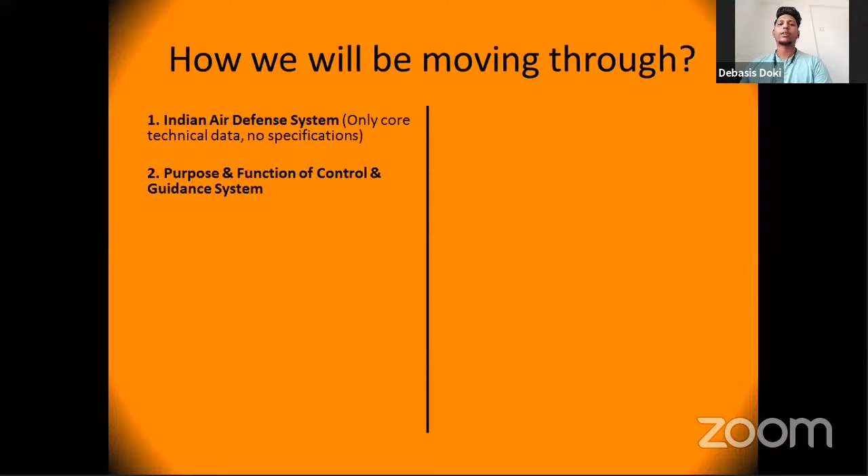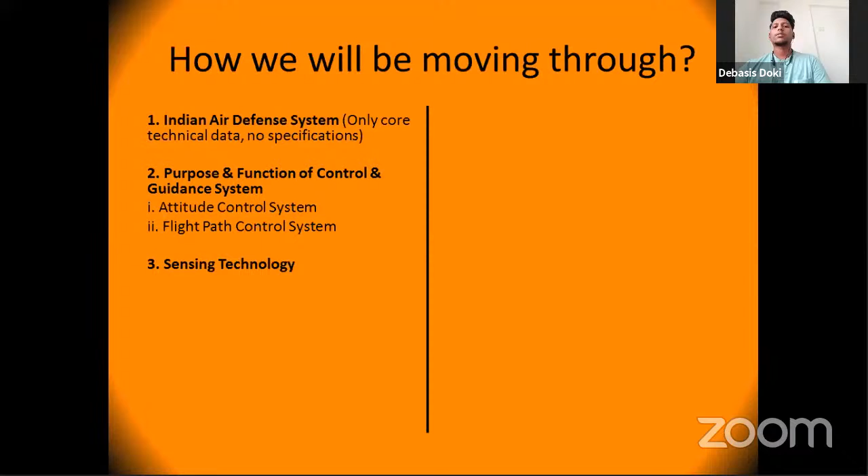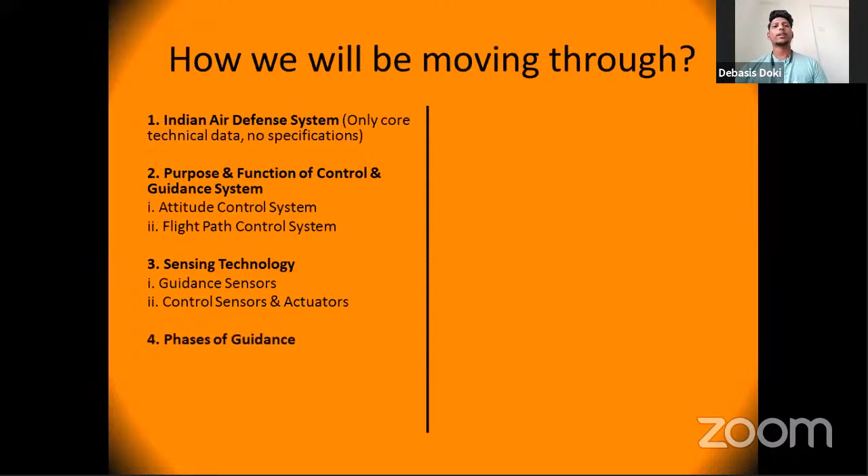Sorry for the inconvenience. Next comes the sensing technologies, which will go through the guiding sensors, the control sensors, and the actuators. After that, we'll be going towards the phases of guidance.

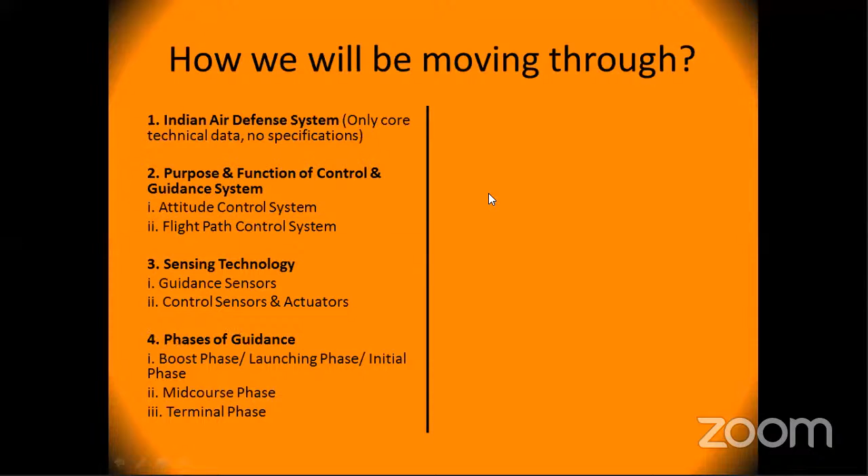I guess all these things will look something different, and why is he telling all this? So John, we can do one thing - you can move ahead, we can show them the list of what we are going through, and start with the approach of the first session itself.

These are the phases of a missile from its start to the terminal, that is till the end - we'll see how things go here. Then John will take you through the tour of control guidance missile, how to guide it, how to go ahead. Then there are different parts, different sectors - I don't want to read it out, you can already see it on your screen. We'll start, we won't waste our time.

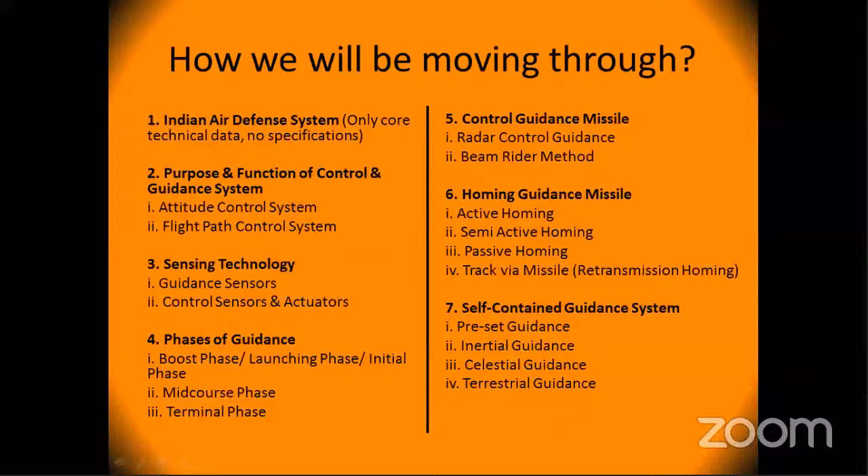We'll start with the first one, that is the Indian Air Defense System. To be honest, the Air Force is one of the biggest things - Indian Air Force is one of the biggest across the world. So how do you think they safeguard us? How do you think they handle each and every problem that comes around? There are different aspects - there are multi-layer air defense systems. When I say multi-layer air defense systems, it's because India is a huge country.

Everything cannot be determined through just seeing something and taking an action - there are things where you have to take actions earlier. I'll just give an example.

There are a lot of interception threats that come around. For example, if Pakistan or China releases a missile towards us, how do you understand it? If you see a missile right in front of you, you can't do anything - you're gone, the country is lost. So there are certain interceptors built here, which can be long range or short range, depending on us, so that it protects us against everything.

So we'll be coming to how the kilometers, how the distance matters, and what missiles we use for particular distances. We'll move ahead with that. So can you go ahead, John?

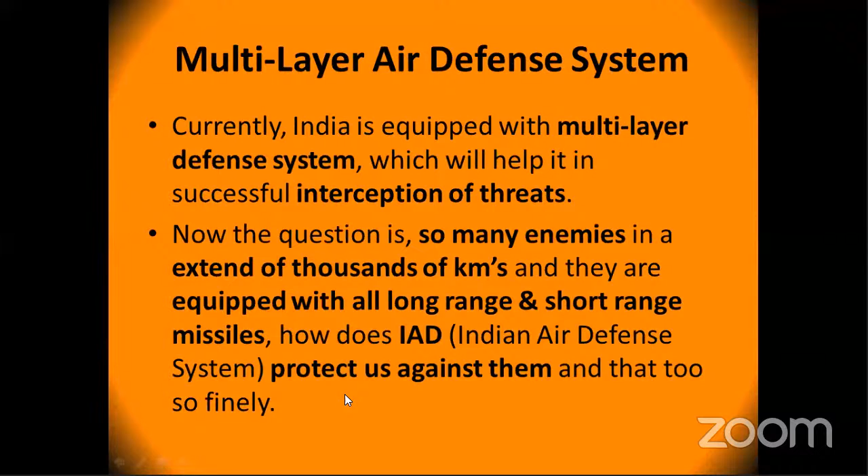Yeah, so this is where you can see the multi-layer defense systems. How does it look?

Okay, so let's go ahead, John.

Yes, okay, now perfect animation. I guess you might be getting a small idea about what this is. This circle was representing the range.

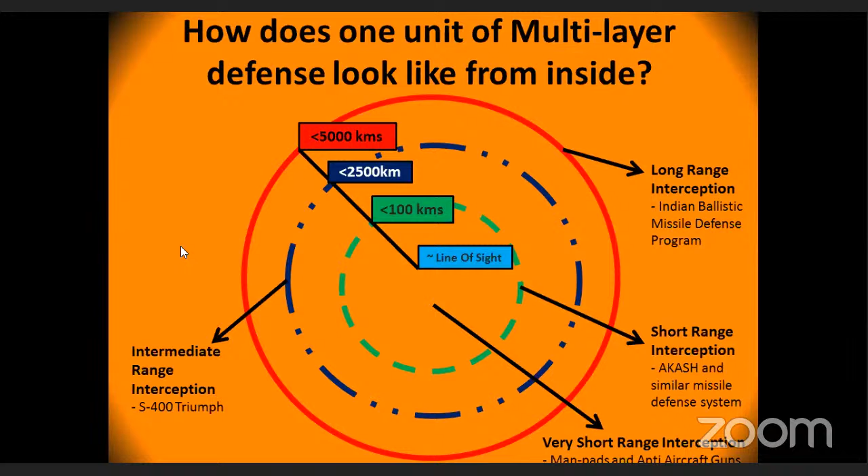And the final one, which is the line of sight, it's the very short range interception. Line of sight, the name itself says when you see a threat, you launch an anti-threat, like you launch a defense system. Okay, most of the manpads and anti-aircraft guns are used here. To give a precise example, many might have watched Race 3, that's of Salman Khan, who just launched a bazooka from one hand. So that is a kind of manpad - the bazooka is one of the manpads used in the area of line of sight.

I hope we understood about the ranges, the different kilometers, how things go, and what are the missiles used.

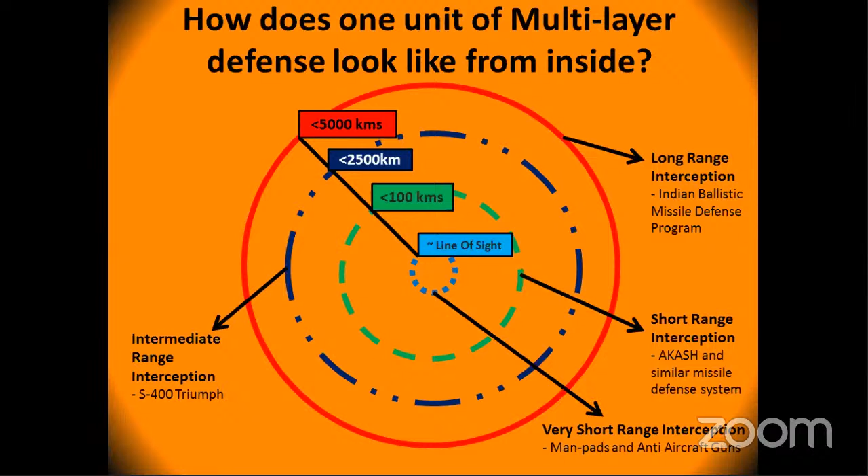Okay, let's move ahead with the other areas. The most important here is the long range interception missile. There are around four missiles which are mostly used, two kept on land, two in the sea. Sea in the sense they can be kept in submarines or ships or anywhere.

Here we talk about high altitude interception. Whenever we get information that a missile is coming from long range, the first thing that happens is the Prithvi air defense system is released. It tries to intercept, or go and hit the missile, to break it out and avoid the threat. Sometimes there's a chance where the missile coming as a threat just dodges the Prithvi defense system. So now it's a problem, it has dodged our missile system and is coming a little closer to us.

So there are other missiles at lower altitude interception, which will help us break through and destroy the missile, using advanced air defense systems. If the missile coming as a threat gets missed by Prithvi air defense, there are lower altitude missiles and advanced air defense systems which will take care of that.

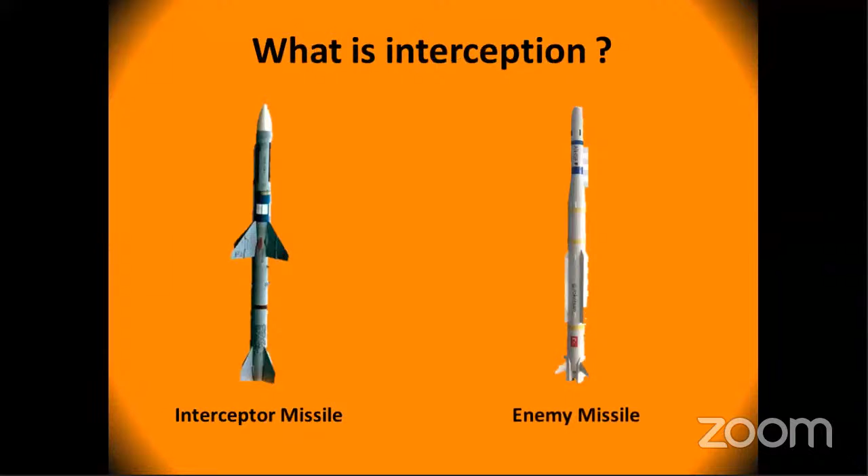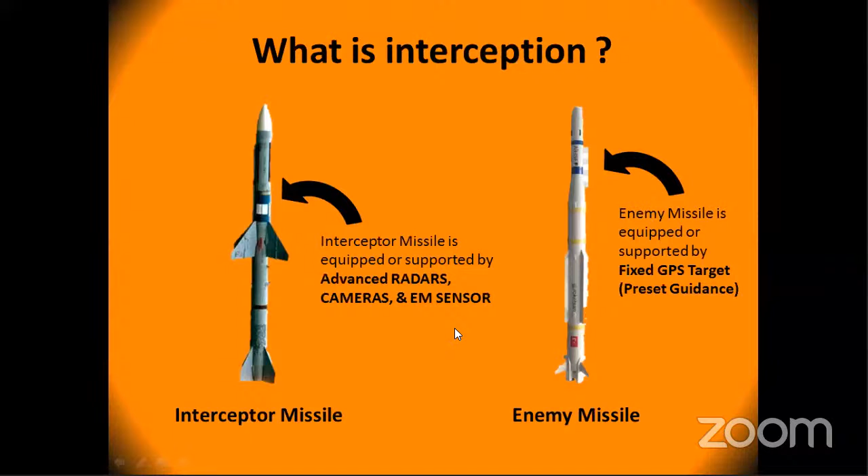The Prithvi interceptor missiles have a lot of sensors, because it's very important for it to understand how the enemy is coming. For that you need certain parameters, certain sensors, certain guiding systems. The interceptor missile is always supported by radars, cameras, sensors, thermal, so that it can sense things coming around for a particular range. Whereas with an enemy missile, we guide it and give it a fixed target - all it has to do is go and hit it. That's the enemy target. So this is the basic difference between interception and the enemy missile.

Let's first watch this video that has been prepared for you so that you get an absolute idea about what I am trying to speak.

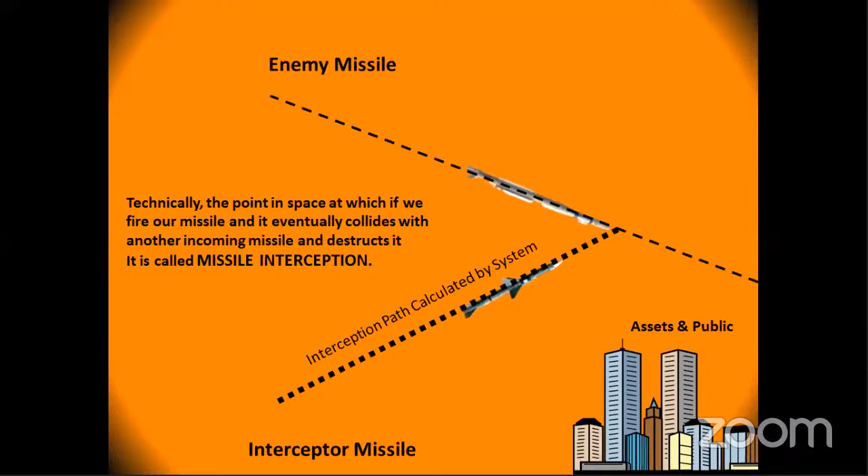Okay perfect, so I guess most of your questions related to interception have now been solved. This is how the interception works - this is how an interceptor missile calculates based on its system, and then based on the calculation it tries to reach the speed of the enemy missile and blast it. Most of the time it gets difficult when the speed of an enemy missile is at its peak, and it has to go under a lot of pressure, a lot of calculations, to attain the actual speed. Because if it misses out, the assets and public are the ones who will face the destruction.

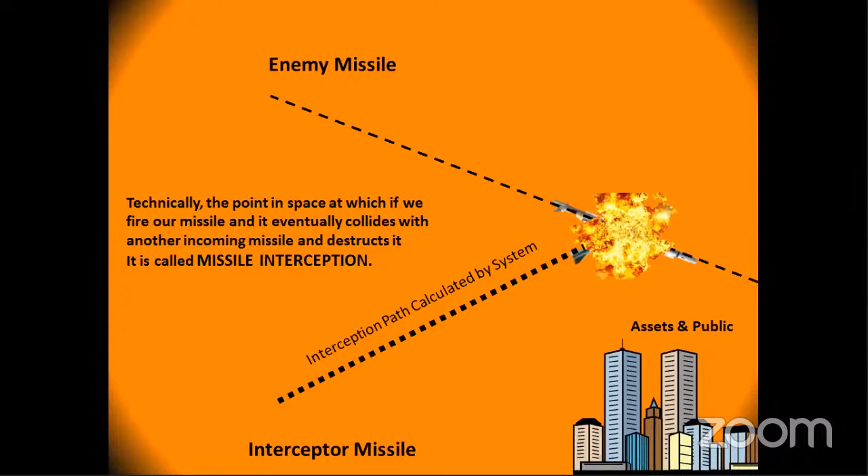So basically the solution is missile interception. Next comes the purpose and function of control and guidance systems. Talking about this, what is the purpose and how to guide? I'll show you an image of it. This is an attitude control. What is an attitude control? You might have heard in physics about the left hand rule, left hand thumb rule, right hand thumb rule.

Mr. Galaxy can't hear. Guys, others, can you hear me? I hope others can hear me, please say yes if... Hello, hello, hello John, am I audible? Yes Devashish, you're audible. Okay fine. Just ask others if they are. Others, please tell me if you are audible or not, because I don't want you to miss out on the basics and then go directly to the advanced.

Okay, so as I was talking about attitude control. You might have learned about this left hand thumb rule. What is the right hand thumb rule?

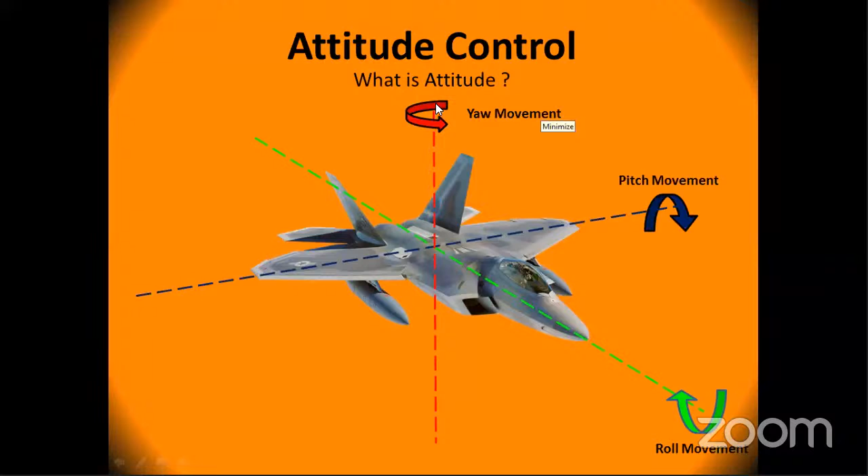I hope you understood what I'm trying to say. These are the three axes through which a flight moves, and we have to take care of this - these are the yaw, pitch, and roll. Let's go ahead, this is about the flight which we are trying to understand.

But how about in a missile? How do you find out the attitude, or all three axes - the yaw, the roll, or the pitch? Let me tell you.

If you see, it's a symmetric body. The only thing common here for everything is the roll movement, because it walks along the axis, so the roll moment is fixed. But the pitch and yaw cannot be determined, as they are perpendicular to each other.

It is the one who knows about the accelerometers - the person working on this, or the manufacturers, or the guided ones who have made this model - they know where they keep the pitch and yaw. So there's always a thing that pitch and yaw cannot be determined just by looking at that.

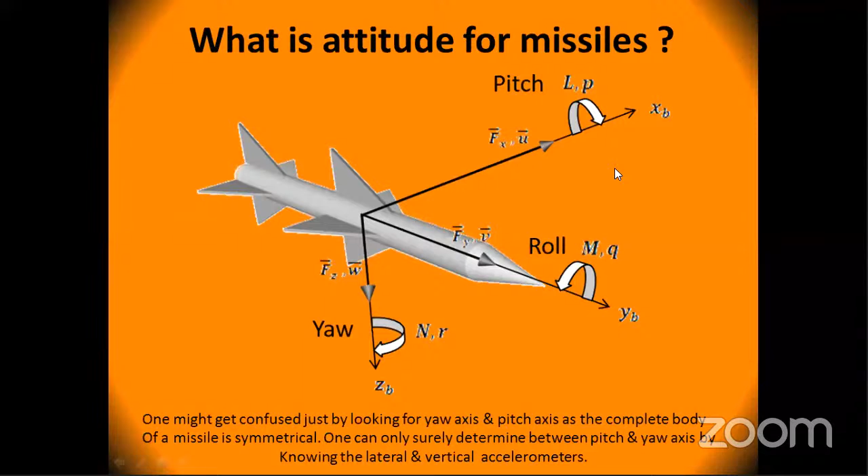So what is an attitude control system? Why is it used? Why are we using these systems? The most important thing why it is used is to control.

When I say control, it controls everything from the dampings, the fluctuations, the deflections, in order to keep the missile in a proper direction, in a proper path, so that it doesn't go out of the path and miss the missile or the threat which is coming. So this is the reason why attitude control is being used.

I hope this is understood - it takes care of the damping, it takes care of the fluctuations. There are basically three different types of stability that come into picture that attitude control looks after. Let's start with the first one.

The first attitude system which we look at here is positive stability. For example, think we have released a missile, and there's a little instability which we give to it. So now the missile which is going is unstable, and then slowly it comes to stability.

It gains the stableness, so this transition of instability to stability is known as positive stability. Second is the neutral stability. For example, the same way we release a missile and it's going around, then we provide an unstableness. So what happens here? The amount of unstableness which we provide, it continues to move in that way only.

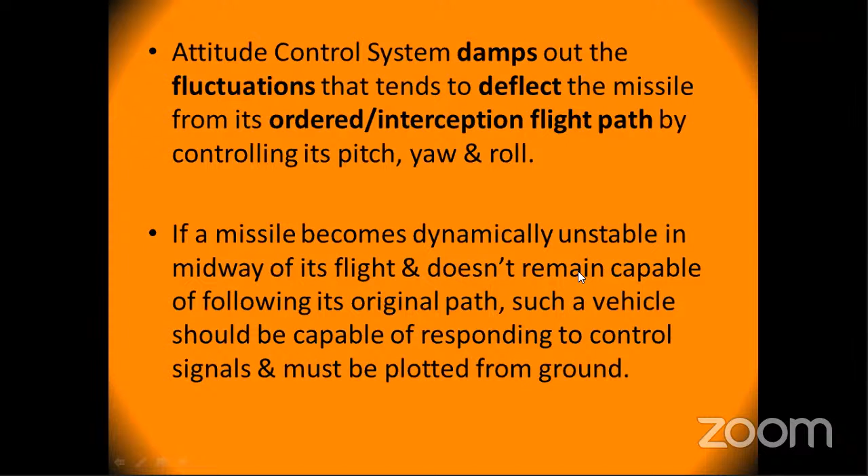There should be maneuvers, and there will be control systems from the ground itself so that we can help. For all this, we use attitude control, because if it misses out, it can harm. It can either miss the target, or it can go and hit our own territory. So it's very important to guide it and control it. That's the reason why attitude control systems are there, as we have already covered pitch, roll, yaw. Now let's see the flight path control systems.

The name itself says most of it. Every missile has been given a certain path to be followed, and that is how it is controlled.

For example, the flight path milestone 1 has a direction, you can see an arrow mark, and then a second point. The green part is the direction which we have chosen for the drone. Similarly, for flight path milestones 3 and 4, you can see that green color path.

If it misses out, you can see a red color line, this is an undesired path, and it will disappear. This is the path we have taught and are trying to achieve. It is very important for us to maintain this path, or else an undesired path will be taken, which is not in our consideration, and that is a failure.

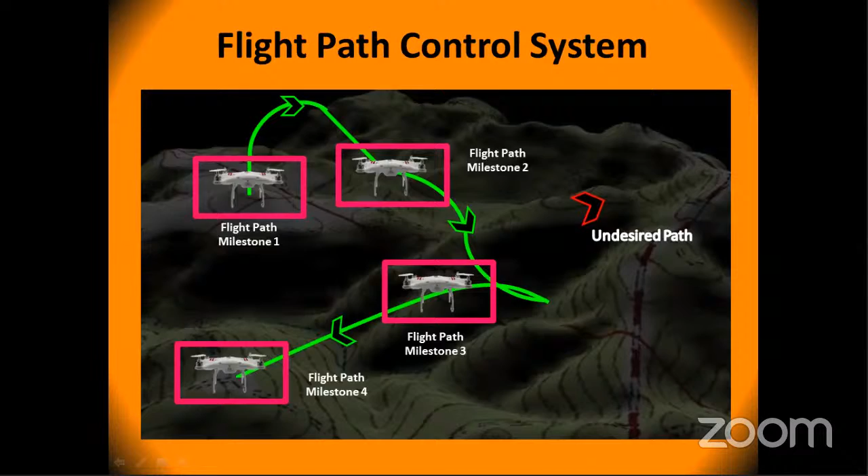Let's move ahead with that. As I was telling, the flight path control system defines the flight path, because without a flight path, you cannot reach the destination or intercept the target. That's the reason why it is very important.

It is controlled, and it works simultaneously with the attitude control. If there is a problem, a deviation, or an undesired route that has been taken, this will lead to mission failure.

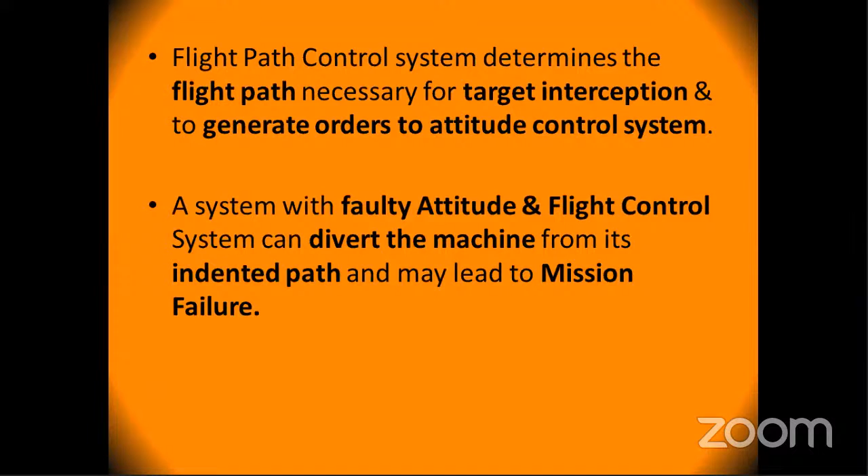Let's come into what is sensing technology. Sensing is to understand how we sense through our sensory organs. It's the same way a missile senses things.

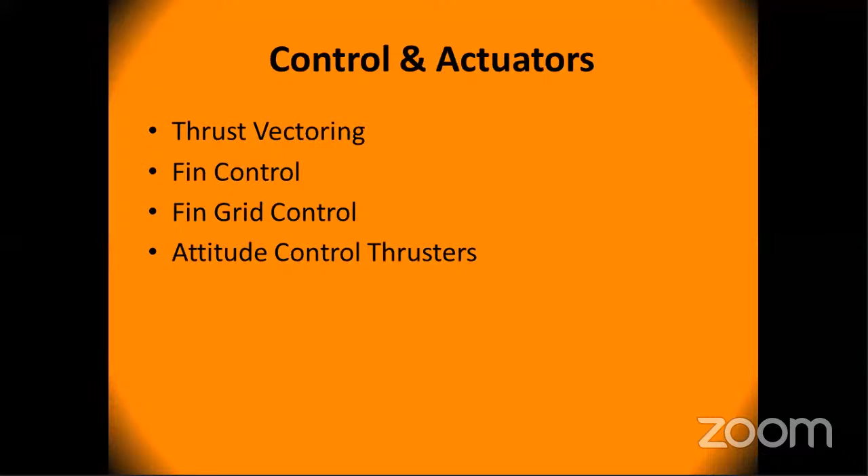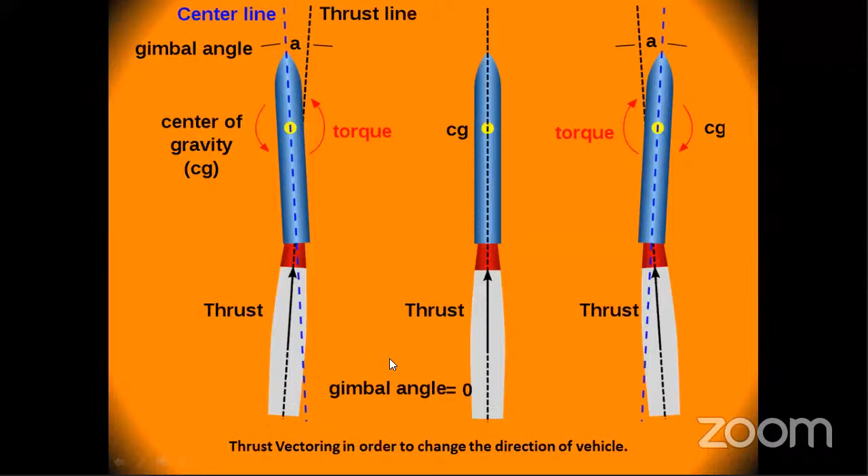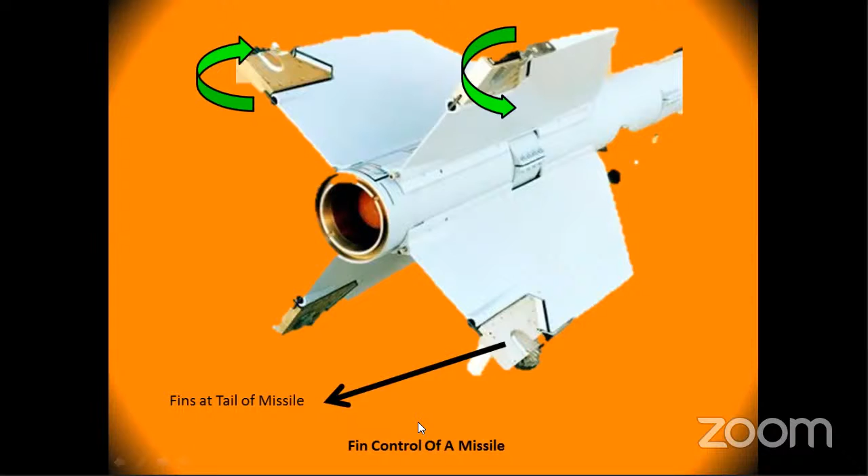Okay, next, John, can you share it?

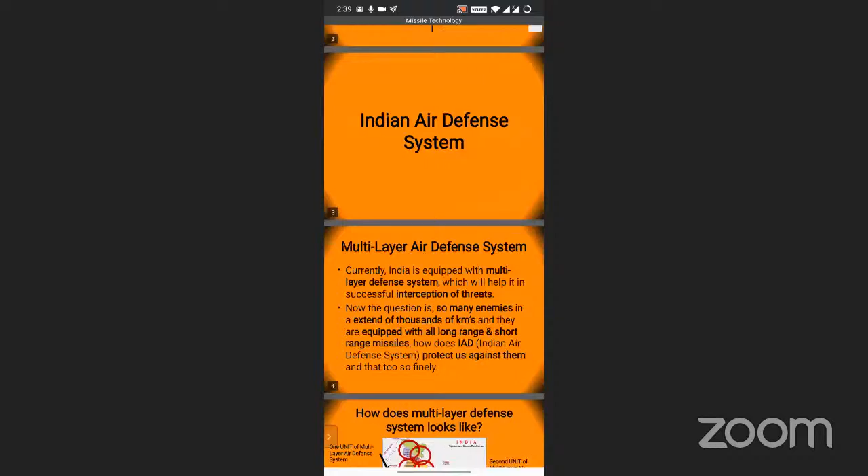Guys, can you see the screen? Hello, can you see the screen, guys? Yes, sir. Okay, fine. Sorry, I guess he went out somewhere or something happened with the system. So let's start again. Sorry for the inconvenience.

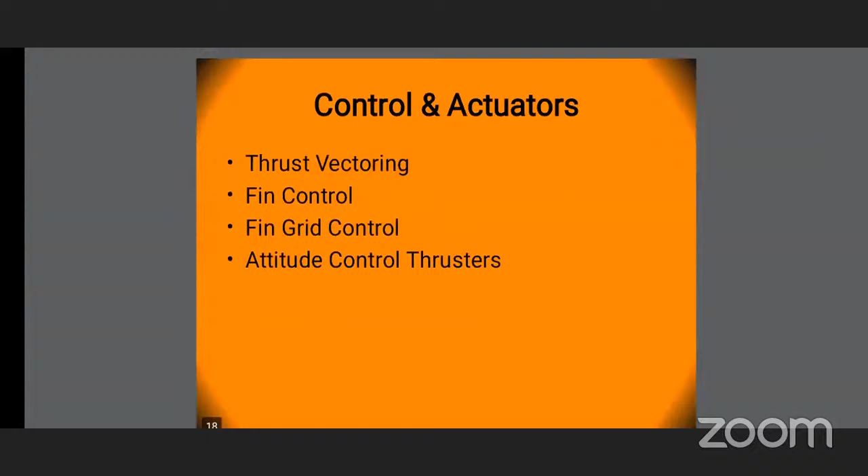Okay, so we were talking about the guidance systems.

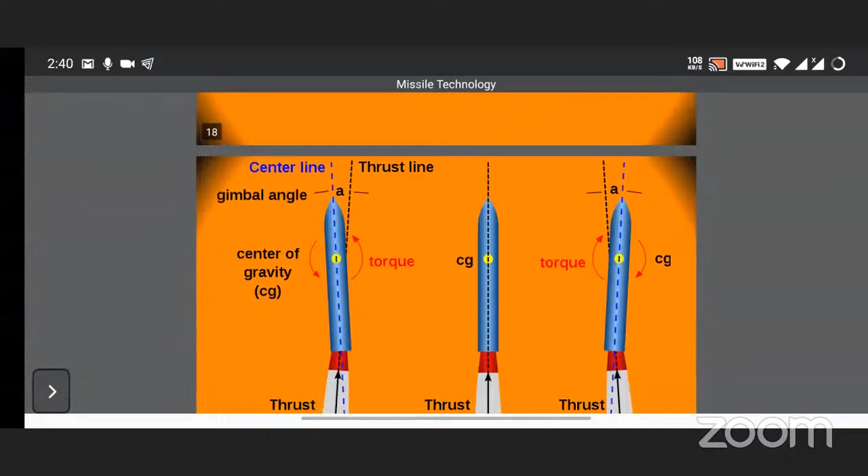Okay, so we have already discussed the thrust vectoring. Now we were at the fin control, and let's come to the grid.

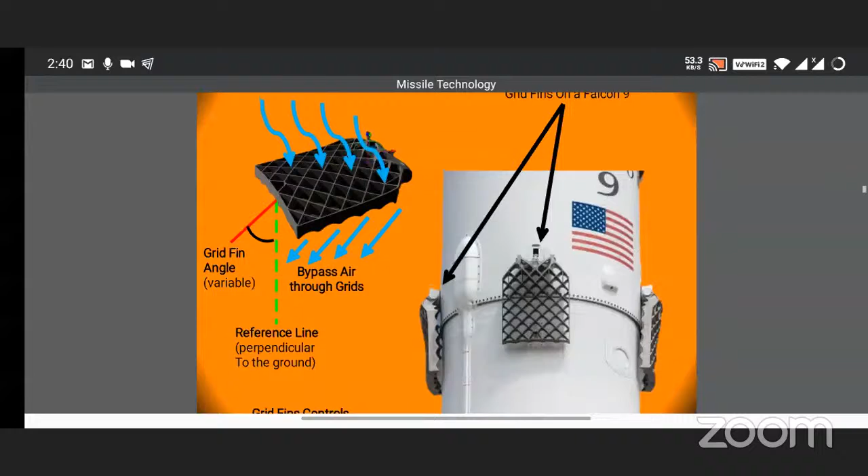Okay, this is the grid fin control. The image in front is of Falcon 9, which was released first, owned by our famous SpaceX, Elon Musk. So this is something new which came into the picture. The gray color part is the grid fin. It's a kind of fin, and what they do is, you see the structure of it.

Now to control it, it will be moving up and down here and there. You can see a video on YouTube, it's available. While landing or taking off, these fins started moving up and down, and then it was trying to adjust. We'll see how here.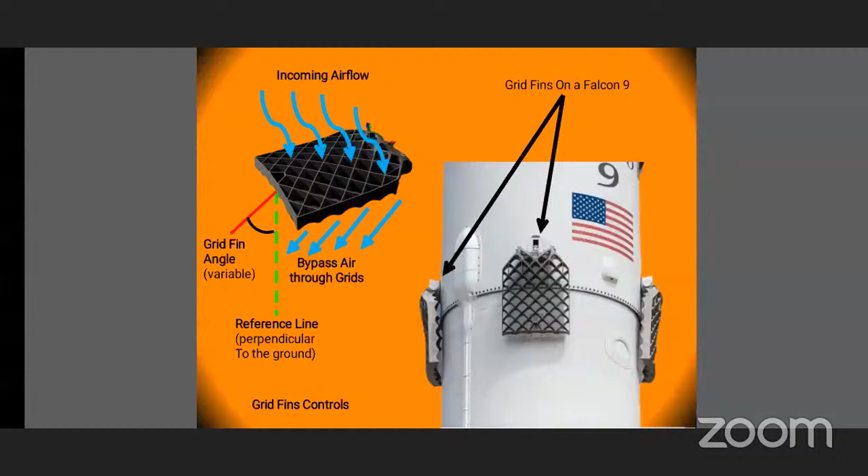If you see the image on the left side, this is the fin angle, the red color line. Here there's a reference line, the green color is the reference line. What happens here is when there is an airflow on top, which is coming, the air will be passing out to the grids. So as per the passing out, there will be changes up and down, so to maintain it into a proper reference.

Now this is something that looks cool, if I'm not wrong. So here, this is the attitude control thrusters.

How things go here is, okay, when a missile is made to come into position to land it stably, for example the Falcon 9, they have thrusters around it. So suddenly when it's time to land, it will release the thrusters. This is the ignition which you see.

It will be done from all sides to maintain it to get a position. These are the axes, like the x, y positive and negative, all four directions, as well as between x, y, z. So in all directions, all six paths are cleared, they release the thrusters so that it can go into a stable position.

Now we are at the point of learning what are the phases of guidance. Basically, we understand there are phases, meaning certain stages: the initial stage, the mid stage, and the terminal stage. I'll discuss the initial first. You see the image, I hope it's clear for you.

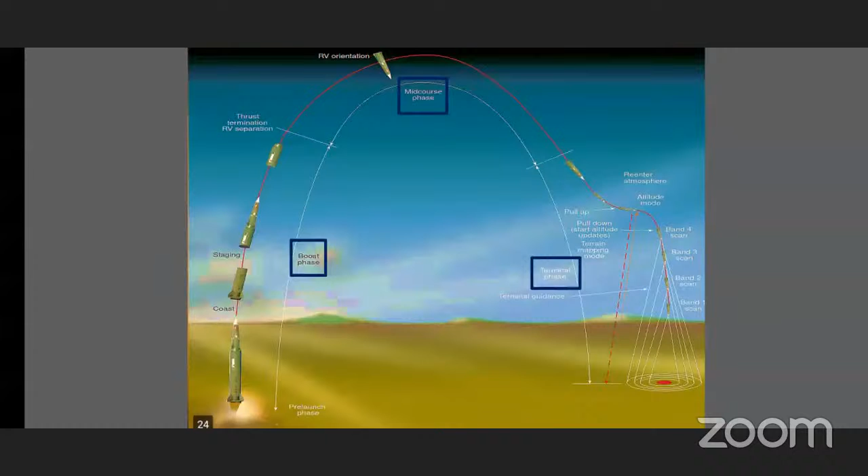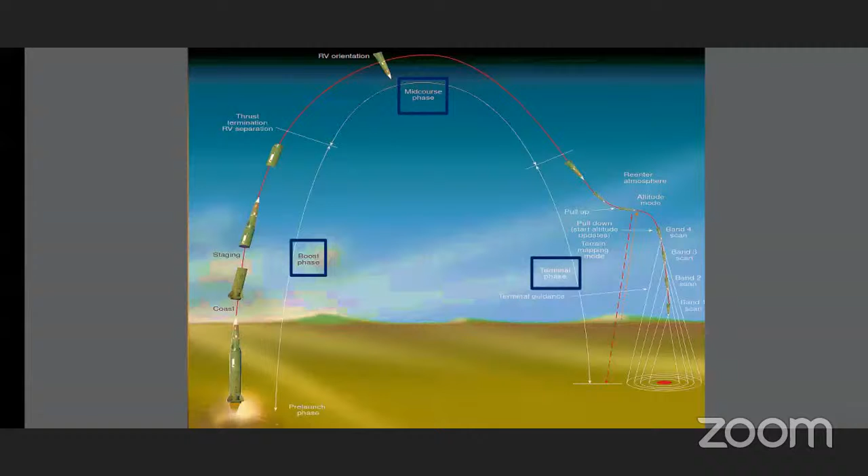The first part is written as boost phase. I'll explain why in the next slide. This is the first initial stage or launch stage. Then is the middle stage, which is the midcourse phase. Then on the right side is the terminal stage, which is the end of it. So why do you think these names are given, boost stage and everything? I hope this picture gives you an idea.

Okay, let's start. Why am I talking about boost, launching, initial? Why are these names given to it? As I told you earlier, there are missiles which are kept not only on land, but also with the navy, inside the water, inside submarines. So these require release from the initial point, we need boosters.

What we mean by booster is something like an ignition. You might have played racing games, there is a feature called nitro. When you click it, it gives a boost, and it suddenly reaches 100 kilometers per hour extra. Correct.

These are the boosters which are attached to the normal missiles. Whenever in the navy missiles are released, the missiles will be having a lot of boosters. These booster components are the reason for it to deliver at the place where it can cruise, meaning hovering, cruising towards the target. To make it reach the exo atmosphere from our atmosphere, the boosters are used. This is not in every missile, but it's for the missiles which are there in the navy.

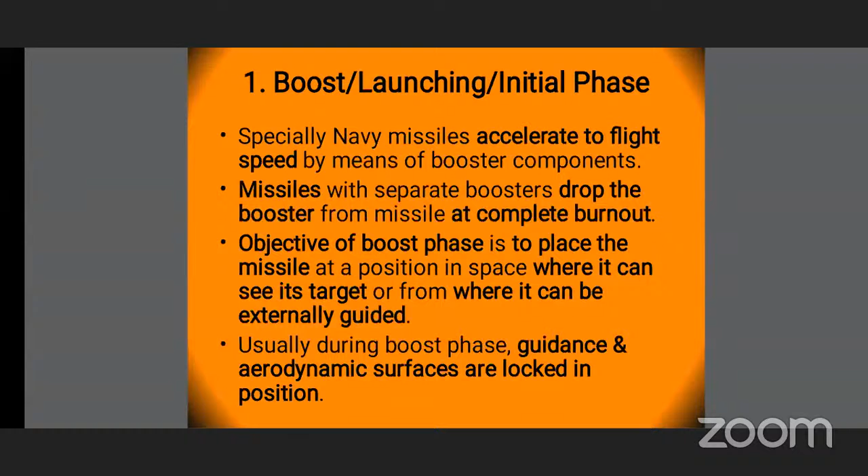These are the main uses of boosters, so that it can guide properly and make the missile reach a point where the final terminal stage will be the nearest. This is the midcourse stage, the second stage. I'll go to the terminal stage later.

The midcourse stage is said to be the longest because here the distance that has to be covered is the most. This is the place where it has to be very stable, because it will be from where it goes towards the final stage. So it's a long range that has to be covered.

This is the main phase of a missile, which you might have seen in a lot of movies, where you can see it cruising. If you've seen Mission Mangal, where they were releasing satellites, there were boosters used for ignition, sudden ignitions. These are the things which are used for a missile also to make it guide.

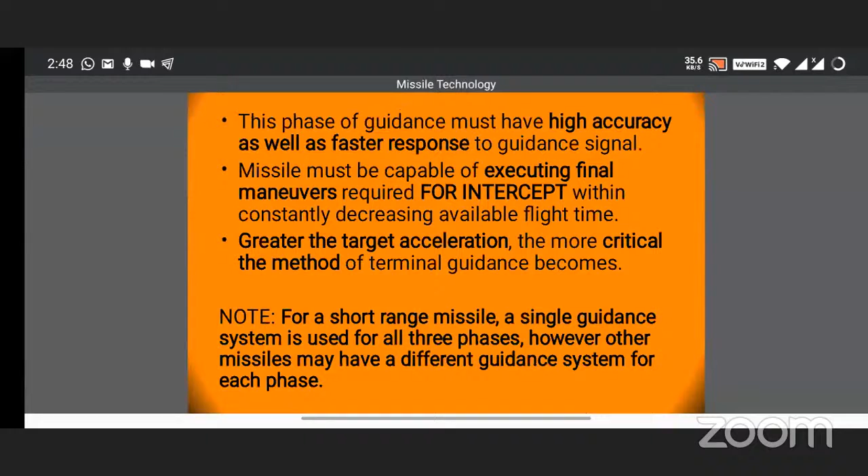This is the final stage, the terminal stage. This is the most important stage, because this is the stage where everything depends on the destruction, the result. Everything depends on the terminal stage. It has high accuracy, and the response and accuracy must be at the top, the top priority. So there are some features added in the terminal phase.

There can be a situation just before it hits the target, where there's only a 2-digit kilometer distance nearing, and it has to be destructed. But there can be a dynamic instability, moving here and there. So to control it, there should be something controlled from the ground, as well as it should have the capability to control itself, so that it intercepts properly, or else it's a complete failure. Because if it misses out, the target will not be hit, but it will be hitting the assets, the public. That is why it's very important that it has a certain guiding system for the terminal phase as well.

The greater the target acceleration, the more critical the method of terminal guidance system becomes. This is completely true, because if a target is moving at a faster speed, it's very important that the missile should also attain that speed. I guess not only that speed, it has to attain 10x more, so that it can match the speed of the target and destruct it, breaking through it.

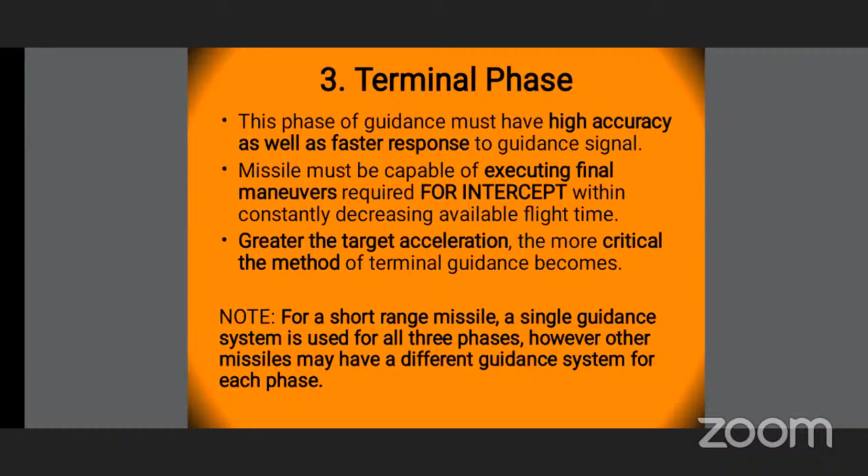It requires many kinds of guidance because it has to cover a long range. That's why it's important to have different types of guidance systems in each phase - for the initial phase it requires some guidance systems, for the hovering and cruise phase it requires some, and for the terminal phase it requires guidance systems.

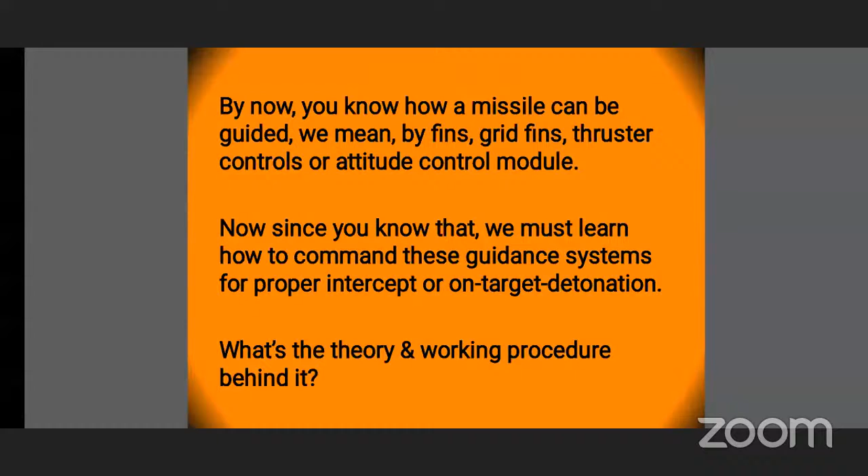So far we've covered the guiding systems - the fins, the grid fins, the thrusters, and the attitude control system. We now understand how a missile moves and how you can control it. Now let's understand how to command these guidance systems for a proper intercept, making it target-oriented with target detonation.

So here I'll be calling John. I hope he's back, I haven't checked. He'll be taking care of the types of guidance systems, from there he'll be telling you everything. Okay, he's back finally - thank you John, I was waiting for you. Most welcome Devashish, and sorry everyone for the internet inconvenience.

As far as Devashish has cleared you up on how we can control it - the fins part, the thrusters part, the actuator part, the attitude control system, and the grid fins as well, like in the Falcon 9 system - now I want you all to buckle up because we are going into the real core part of missile technology.

So how is it going to be? There's a small index again - separate kinds of guidance systems. Deva has already cleared you on guidance systems, but I'd like to put some extra highlight on it. The guidance system means how the system is going to be guided, how it's controlled - who tells it where to go, what to hit, what to see, what not to see, which paths to follow. There are multiple methods of it.

The most popular science-fictional method is that the missile searches its target by itself. Like, let's say you put my photo into the missile's programming, and it will search for me throughout the earth, and wherever it finds me, it will destruct. So this is one of the guidance methods.

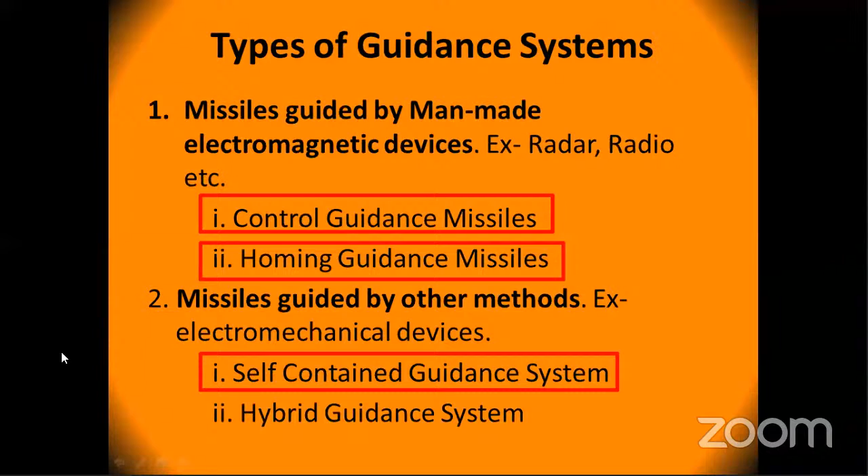Coming to the control guidance missiles - first of all, control guidance missiles means it is being guided on the basis of electromagnetic radiation, even radio control, just like you fly a drone using your transmitter. A similar kind of principle goes with these control guidance systems. Using these systems, we can take information from our missile, like what it can see and sense, and send data from our control station to the missile. So there's 2-way communication between them, and using this we can guide the missile.

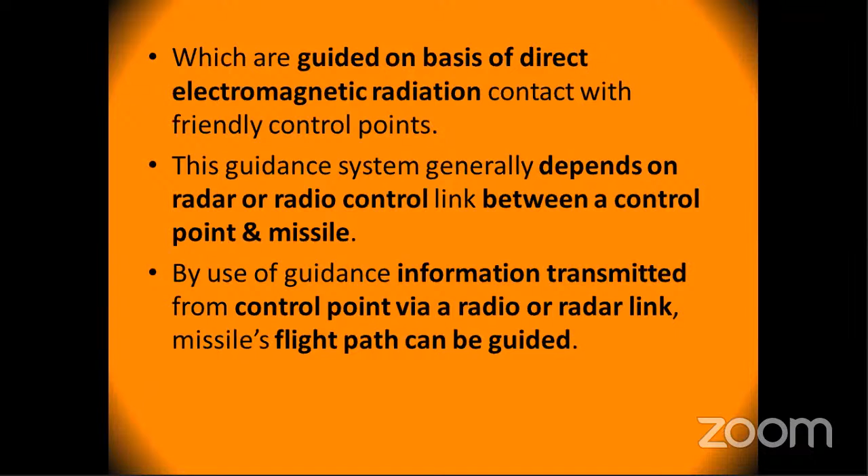Now the first category into control guidance missiles - if the index is clear, the path is clear, you'll better understand it, so I'm trying to refresh you with the index. The first one is the control guidance missile, and the control guidance missile is the radar control guidance missile. This is too simple, I'll read out all this and explain.

Before that, I want you all to clear up with the thing that radar control guidance missiles or command control guidance missiles are nothing but having a remote control in your hand. Don't think of it as a remote control, obviously it's a control station. You'll see some pictures of the control station ahead. You have a transmitter or remote in your hand and a missile flying, and you can control the direction, detonate it at any point, calculate the interceptions, everything. But the control is completely manual, and in normal terms we call it a manual overrided system.

A guidance system in which complete guidance and commands, like how the missile is going to work and what kind of path it is going to follow, is completely guided by an external source. Just like I told you, with a transmitter or remote control outside the missile, some person is flying it. The missile contains a receiver and can receive data from the control station, and it can also send data back to the control system. The missile path converts these commands to guidance information, and then it goes to the attitude control. So if you're sitting at the control station and want the missile to fly 80 degrees north, you set your transmitter to 80 degrees north and the missile starts flying there. This is completely like manual control.

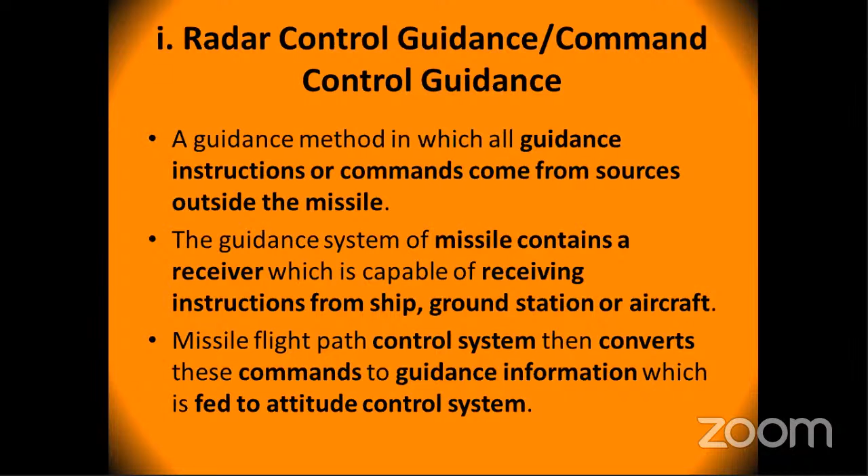In this method, one or two radars are used to track the missile or the target. Now let's talk about interception. I think you've all seen Mission Impossible 4. There's a cruise missile coming up going to hit some particular area or territory, and there's another missile launched by our team. It hits or collides with the incoming missile so that it destructs it up in the air and none of the public or assets are damaged. That whole scenario is called interception.

In this radar control guidance method, one or two radars are used to track the missile sitting on the ground. Let's take a scenario: you're sitting in your control station, and you have a radar continuously searching for any kind of unmanned aerial vehicle or object, maybe a missile, in the air. As soon as you see the enemy aircraft, missile, or drone, you track its location and calculate it yourself. There's no calculation system in the missile. You calculate it not manually using a calculator, but through programming systems on the ground itself. You calculate the interception path, the coordinate in the air where, if you redirect your own missile, it will eventually collide with the incoming missile, destruct it, and protect your asset and public.

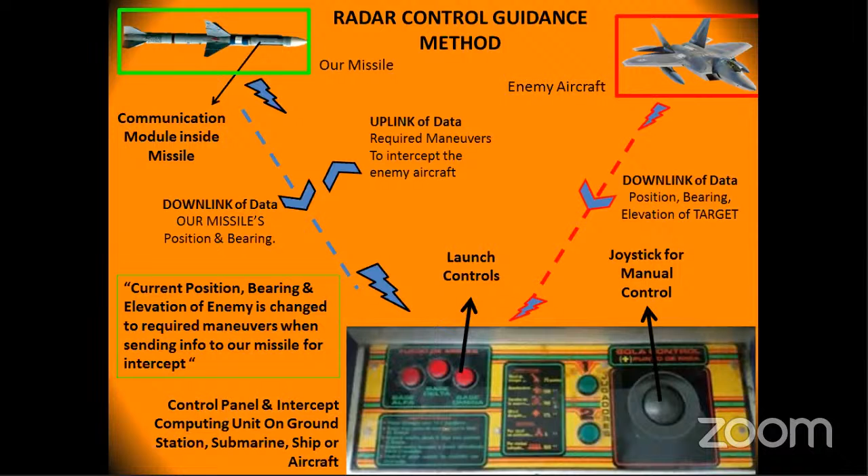Now, once you understand one kind of method, others are a little bit of modification, plus or minus, so you'll better understand that. The second one is called the beam rider method. Now, beam rider method has major differences.

In that particular radar control guidance, first of all you have to switch on your radar so that it tracks the system, and then you switch off your radar and switch on the communication module to transmit the data to your missile. Now a lot of people would be raised up with the question: why can't we keep our radar and communication module switched on together at the same time?

Because our radar will be sensing our missile as well into the system, and there's no way you can differentiate between two different missiles using just a radar. You need a visual image, you need a particular kind of code that's being sent onto ground. So that is a little bit of complex data.

However, radar control guidance method is not being used very frequently anymore, but a few kinds of systems still have them. So in beam rider method, the characteristic of the missile tracking beam is never varied. What happens basically is, the computation was done on ground before, right? This time the computation is being sent onto the missile itself.

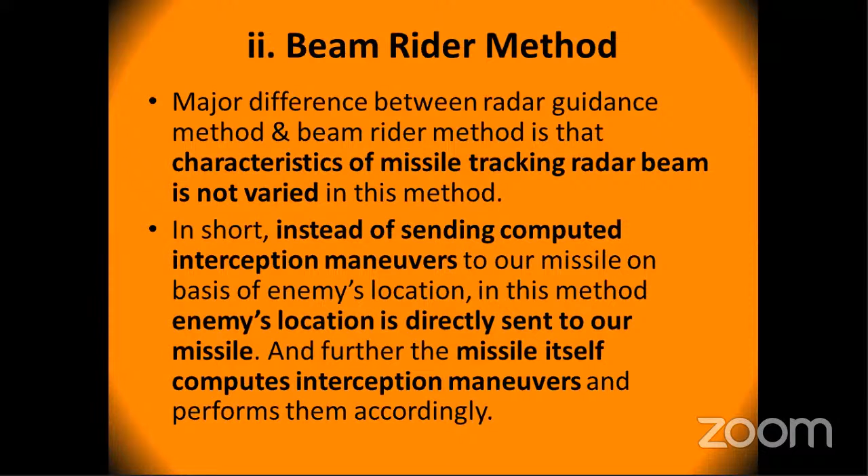You don't have to compute the intercept location on ground; the missile itself computes it. Computation is okay, but we still need to know the coordinate and actual position of the enemy. So what happens is the enemy aircraft data is being taken onto ground.

So once there is a downlink of data and then there is an uplink of the data, you don't need to switch between both of them. There's no two-way communication. So now we are clear with the radar control guidance method: you take the position, you take the target position, you compute the interceptor path on your own, and you can maneuver it using the joystick.

You can maneuver your own missile using the joystick. This is one thing. The beam rider method is where you just take the position of your enemy and don't compute anything yourself. You feed that particular data to your own missile, and your own missile computes the target interception, where to hit, where not to hit, when to collide, when not to collide, on its own. Now these are two control guidance methods.

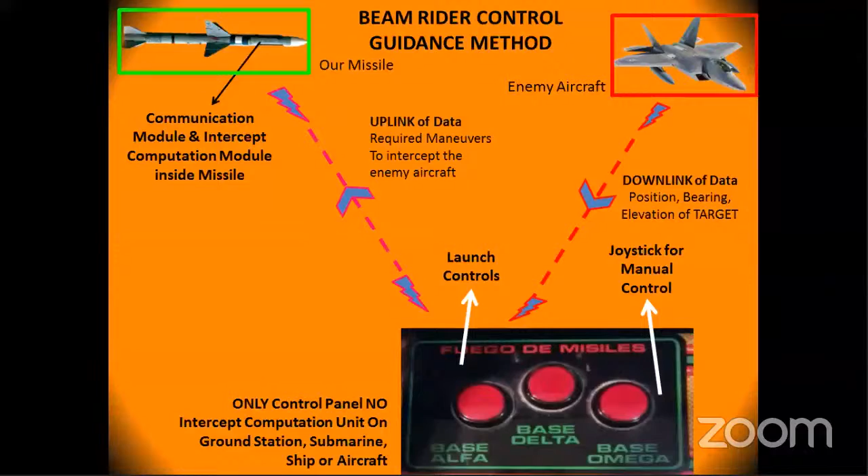Now coming back to homing guidance missiles. The first one was control guidance missile. Why was it called a control guidance missile? Because there's a ground station which is involved in the system, directly or indirectly. Therefore the control is finally in the hands of the ground station.

Now coming back to homing guidance missiles. Let's talk about homing guidance missile. It has a sensor that responds to electromagnetic waves, or to a particular kind of energy, since each missile radiates some energy or communicates through its own ground station to its enemy's ground station. So we can sense if there's some vehicle transmitting data that is not our data, or that is not something we already know. That will be considered a suspicious vehicle. So homing guidance missiles have sensors which sense any kind of distinguishing feature of the enemy.

And these missiles are very sensitive. How? They sense radio frequency, infrared, and reflected lasers. They send the laser, and if it reflects back with certain data, that's how sensitive they are. They also detect sound and visible light, meaning the visible frame. They see it and identify whether it's our missile or not.

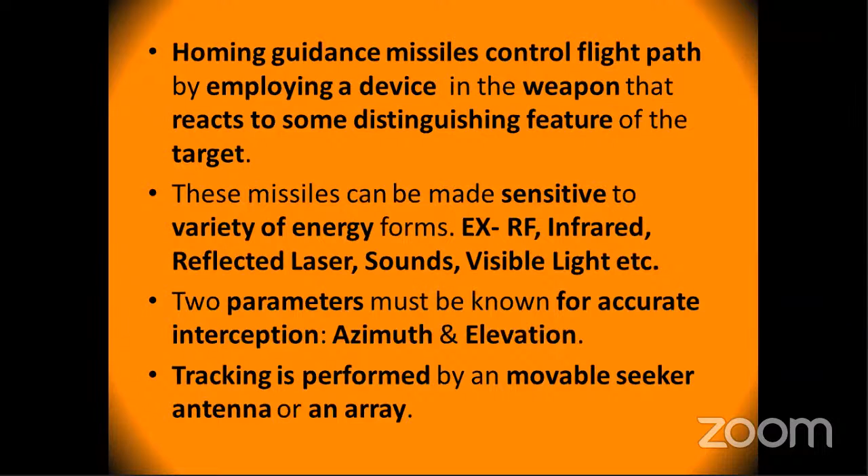Now, the first category is called active homing missiles. This is a very important part because this category is the most widely used throughout the world. In active homing missiles, both the transmitter and receiver are in the system. The transmitter sends some data, it goes to the target, reflects back, and the receiver receives it.

It's just like those toys, not actual robots, that you put on the ground and they move forward, and if they see a wall, they turn back. How do they do that? They keep sending pulses and calculate the time it takes to reflect back. If the transmitted radiation reflects back too early, they think the wall is too near, and they turn to the left or right. Similarly, radiation is sent continuously from the transmitter and then received by the weapon itself.

There is no ground station at all. These kinds of missiles are also known as fire and forget missiles, just like Nag or Prahar. These are the most capable active homing missiles.

Now the search and tracking is conducted by a tracking sensor, and there can be multiple tracking methods. The target is not tracked in a unidirectional way, it's not just searching in one direction or looking straight ahead. There's a monostatic geometry, meaning a particular kind of geometry that remains fixed throughout the flight, but it's not looking straight through. It keeps sensing the data coming back after reflection, checking whether the missile is too near, whether the radiation is the same as sent, whether it's our vehicle or not, and how the system responded.

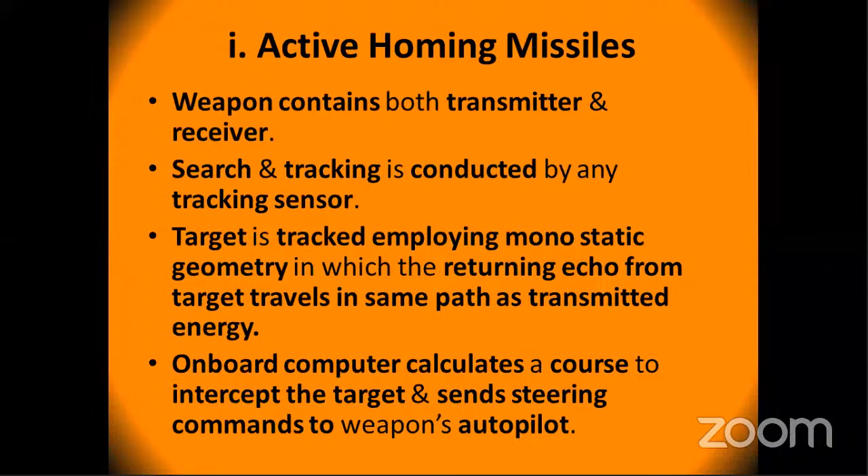Coming up to semi-active homing missile. Now, active homing is completely on itself; there's no ground station. In an active homing missile, the sensor is equipped into the missile only, the transmission is also into the missile only, the receiver is also onto the missile, and along with it, the onboard computer is also onto the missile only. But in a semi-active homing missile, the target is not illuminated by the weapon itself.

There's a separate ground station that searches for the target. It keeps on sending the data or radiation to the target, and the radiation sent is not reflected back to the ground, it's reflected to the weapon. On the basis of how long it took for the radiation to reach the target from the ground station, and how long it took to reflect back to the weapon, that kind of data and distance is calculated. And again, there's an onboard computer that searches for when to intercept, what will be the position of interception, and how to maneuver the system.

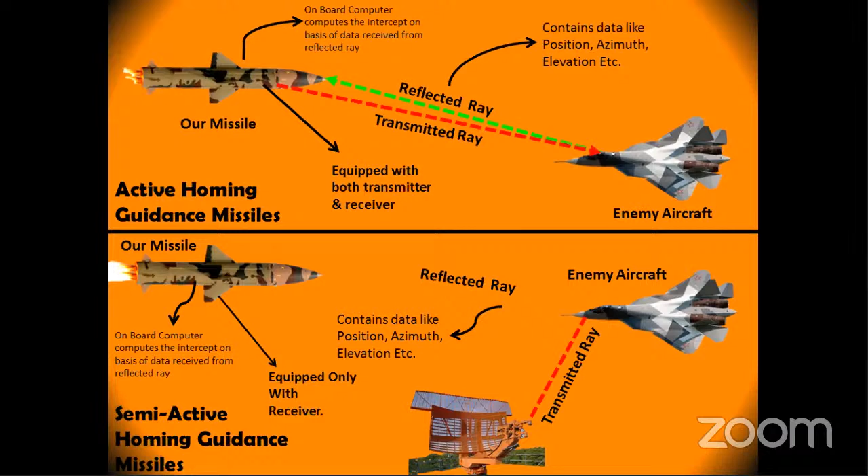So what basically happens now is everything is the same; the only thing is the missile won't be transmitting the radiation. The ground station will transmit the radiation to the aircraft, and it will reflect back to the missile. On the basis of that reflection and whatever data is received, it will be computed, because the onboard computer is still onto the missile only. The difference between active homing and semi-active homing is everything is the same; the onboard computer is in the missile only and detects the interception on the basis of the reflected ray. The only difference is active homing will itself send the radiation and receive it, whereas in semi-active homing, the missile won't send the radiation; some ground station will send the radiation and it will reflect back to the missile.

Now there's one good thing we need to see: in extreme cases, the weapon may lose the target, resulting in a missed intercept. If it's an extreme case, the weapon is moving with very fast acceleration, there might be cases of interception miss. This kind of disadvantage of missing an intercept is compensated by greater power or high frequency illumination. The radiation that was going can be of very high frequency, or very short wavelength.

And these kind of changes, if we do into the radiation, we can cover a lot of range and area, and still compensate for the fact that we might miss the intercept. Because we have some parameters that we can change accordingly for increasing the accuracy.

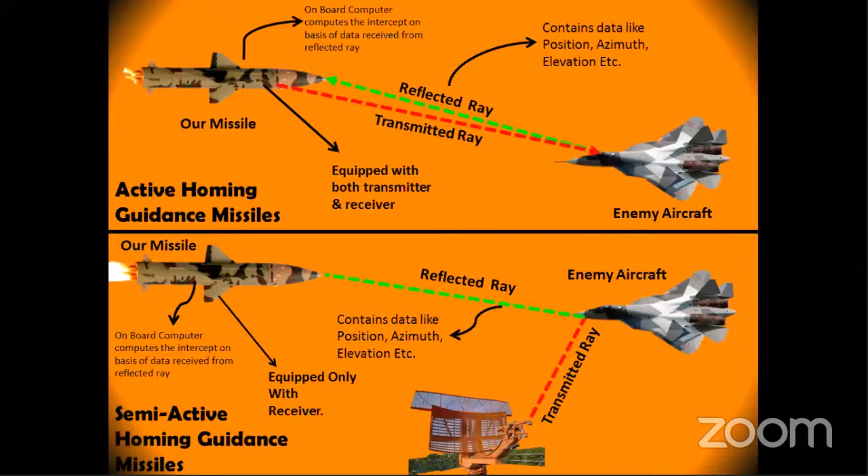Okay, we have seen all this. Now coming to passive homing missile. It's a missile that basically depends on whether the enemy wants to be found or not, because it completely depends on the target as a source of tracking energy.

I'll give you an example. Just like Deba was telling, you might have seen a heat-seeking missile. Have you seen a dogfight? Not street dogs - dogfight means when two fighter aircrafts have a combat in air. So what happens in a dogfight is, let's say our aircraft is chasing the enemy aircraft, and our aircraft launches a missile.

Now you would have seen in probable cases that the missile keeps on chasing. Even if the enemy aircraft changes its direction, the missile will change direction accordingly and go hit the enemy aircraft. How does that happen? How is it tracking it? How does it know that it's the enemy aircraft and it should track it continuously? The basic idea is there's a source that it sees in the enemy aircraft.

The missile launched from our aircraft is equipped with a thermal imaging camera that senses thermal visibility in the atmosphere. Now the whole atmosphere is cool, right? Everything is normal, nothing too high temperature. The one thing that will be high temperature is the enemy aircraft's exhaust vane, the nozzle, because it's sending the flame out - the burned out gases. So the temperature of that part will be higher than the rest of the environment.

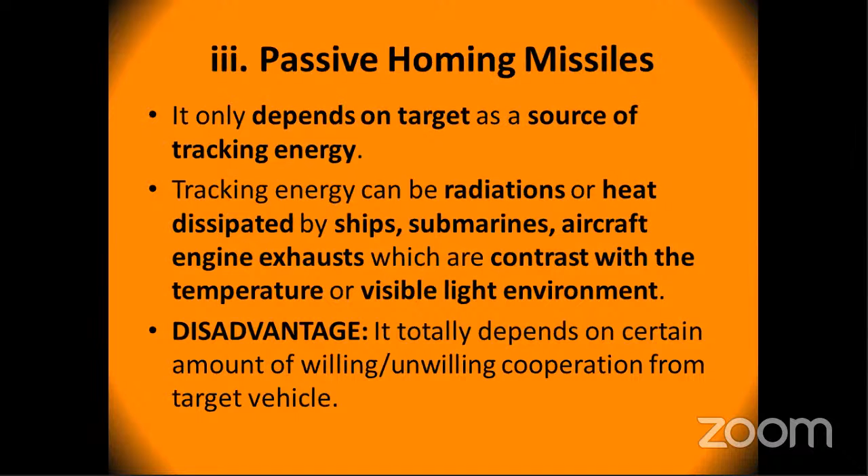And as soon as it searches a particular kind of temperature, it orients itself to that direction and goes and hits it - but only if the enemy has left a clue behind, or is giving some kind of source, then only passive homing missiles can be used. Now the disadvantage: it totally depends on a certain amount of willing or unwilling cooperation from the target vehicle. Only if your enemy is going to cooperate, willingly or unwillingly, then only you will be able to use this kind of missile.

The fourth one is called retransmission homing or track-via missile. It is a blend of both radar guidance and semi-active homing. So you remember radar guidance - we completely control the missile on our own using joysticks. And semi-active homing guidance, where the ground station sends radiation to the enemy aircraft and it reflects back to the missile. I'll repeat again so that you remember.

Radar guidance method means there's a complete joystick on the ground station by which you control your missile. Semi-active homing guidance has a ground station that keeps searching and sending radiation onto the enemy target, and it reflects back to the missile. Now retransmission homing or track-via missile is a combination of both. How? The missile contains a semi-active seeker, and it keeps on illuminating from the launch site or control point, just like semi-active homing guidance.

Okay, whatever angles are being received after reflection are coded onto the launch point. With the downlink data, the control center sends the required maneuver to the missile. So where is the computation happening? The computation is on the ground only.

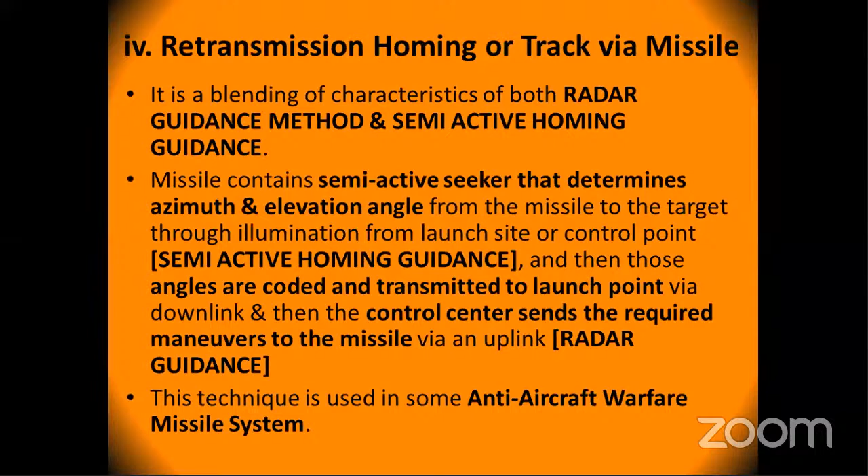This technique is used in some anti-aircraft warfare missile systems. Let's see if we have a picture of it. In passive homing missile, you can guess there will be only one ray, from the enemy to the missile, because if there's a source, then our missile can work just like this. There's no other ground station, no transmission, nothing.

Now come to retransmission homing, you'll better understand this. First, the enemy sends some data, or the enemy data is being received, why it's called track via missile, retransmission or track via missile. So track via missile means you're using your own missile for tracking, even for looking if the target is there or where the target is.

So what happens, your missile detects or locates the enemy. That data is being taken from the enemy aircraft to your own missile. First of all, it can be thermal radiation, picture, or electromagnetic wave, it can be anything. After that, that data is sent from the missile to your own radar. Your own radar computes the intercept based on whatever data your missile gave, and sends back the exact maneuver to the missile. So your missile is also working as a searching radar, and apart from it, the onboard computer is not on the missile, it's on the ground.

I'll explain it again. Retransmission homing or track via missile, because your missile is being used for tracking the enemy as well. So for tracking the enemy, your missile is traveling up in the air, it sees some target, and it will transmit that location to your ground station. Your ground station will compute the interception path or the position where it should collide, and then sends back that particular maneuver to your system, just like a joystick sends it back to your missile, and your missile redirects itself accordingly.

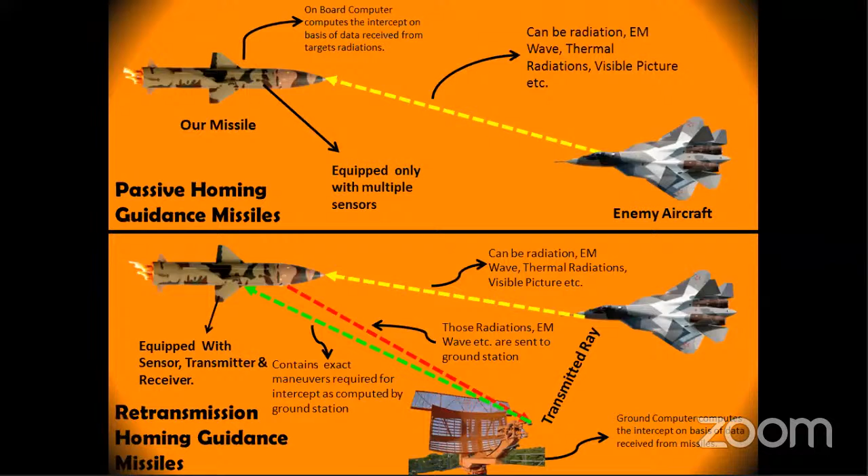Okay, that was part one, the control guided missiles. Now coming up to the self-contained missiles.

Now self-contained missile is too easy, it's like with the name only you can understand that. Self-contained means all the equipment required to fire, find, destruct, everything is within the missile. There is no ground control. As I told you, this is very similar to active homing guidance missile, and these are also known as fire and forget. Once you fire it, you forget it, because it will automatically find the target, go destruct it, find its course, maintain it, and everything.

Basically it's for surface to surface missiles or electronic countermeasures. These kinds of systems do not transmit or receive signals, as everything is within the system only. They're not sending any data to the ground station, and they're not taking any data from the ground station. Therefore, you cannot jam them, there's no signal jamming into it. Unless you actually hit the missile and collide with it, you cannot destruct a self-contained missile.

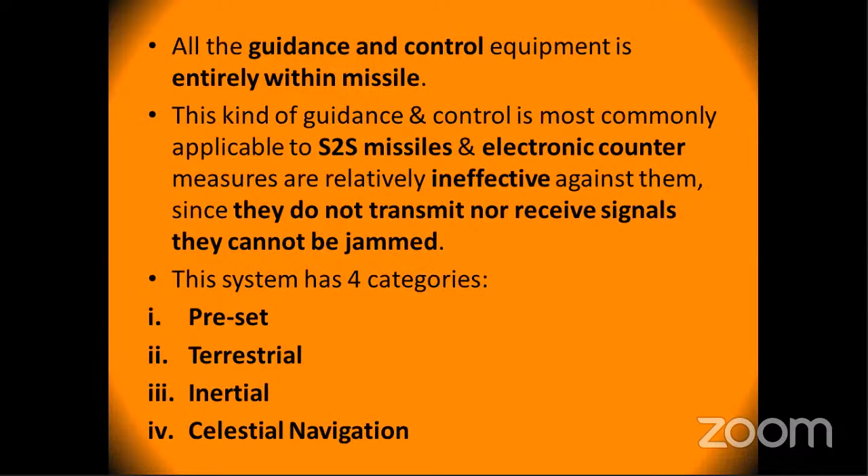Now it has 4 categories. The first one is called preset. The second one is terrestrial, inertial, and celestial navigation. All of them will be very clear by the name only. The first thing is preset guidance.

Preset guidance is like, I give you a missile, and I give you a small keyboard, and I tell you to put in the coordinates where you want your missile to go and hit.

So you put latitude 28 degrees and 60 minutes and something, and then you put longitude 40 degrees this much. Whatever location you have put, it will go launch itself, and it will simply go and hit that particular place. Now, preset guidance is only useful for stationary targets.

Obviously it can't be used for interception, because if something is moving, how are you going to give that coordinate? You have to feed the coordinate continuously, but you can't do that. So basically, if you want to destroy the enemy hangar, or a submarine that is stable, or some ship that is standing at the dock—something that is not moving—you give that particular coordinate to your missile, and it goes and hits that particular coordinate.

The major advantage is it's very simple. Obviously there's no transmission, there's no tracking. You put a coordinate, and the GPS follows and goes and hits it. And it doesn't require any tracking or visibility. There's nothing like that.

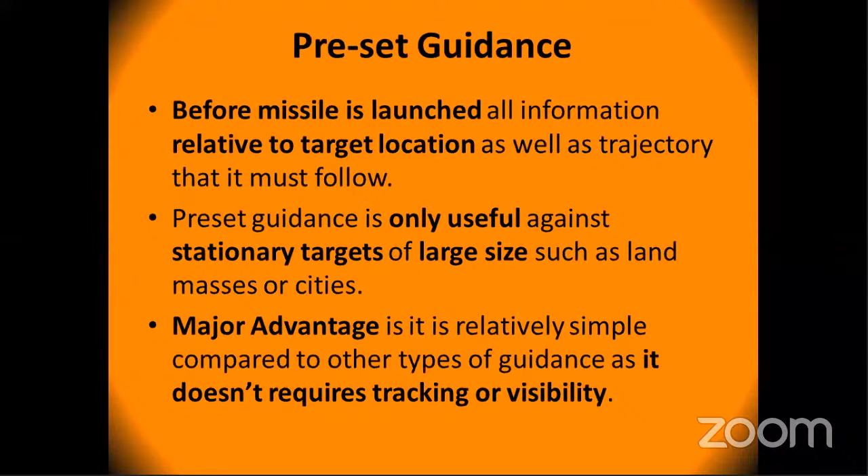Now coming to inertial guidance. Inertial guidance is basically... okay, let's talk about a scenario. I give you a helicopter. Example, I give you a helicopter.

By the way, just a small reminder that Perseverance will be landing today at around 11 or 12 p.m. So if you are an aerospace enthusiast, I would suggest you go and watch how it lands and how it's happening, whether the mission is successful or not. That was just a small update.

Coming back, if I give you a small helicopter and I tell you there's no pilot in it, you have to go for the autopilot. So what would you do? Let's say that it flies at a throttle, meaning acceleration of 70%. At 70% RPM of blades, the helicopter starts flying. But it will be falling to the left, right, front, backward, anywhere. How do you control that?

So I put an accelerometer onto it. Accelerometer—hope you all know accelerometer—is a system or a device which tells you the tilt angle or angle of deflection to any of the sides: x-axis, y-axis, or z-axis. So if you put it parallel to the ground, it will give you 0, 0, 0. And if you tilt it like 10 degrees towards the x-axis, it will tell you that you have tilted it to 10 degrees on the x-axis clockwise, or whatever way you are doing it.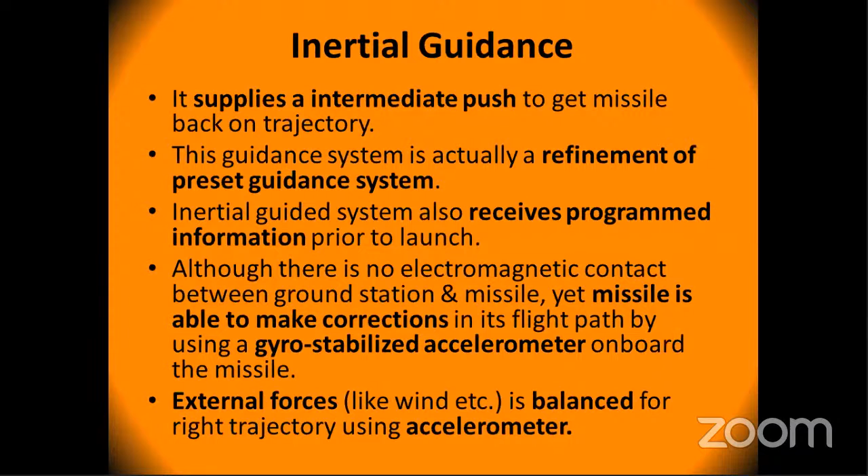Now with this kind of system, we have star trackers. There are certain telescopes, even on Amazon, that if you tell them you want to see the polar star, or the dog star Sirius, you program it in, put it on the ground, and your telescope will align itself using a motor, realigning towards the polar star. If you look into the telescope, you'll see the polar star.

So there are star trackers that know where certain fixed stars can be seen, with reference to a fixed star. Just like in the show Man vs. Wild, where they find direction using the stars or the sun's and moon's position. They identify that this side is the polar star, so this should be north, and the rest of the sides are west, east, and south. If you identify a fixed star as reference, you get to know all other directions.

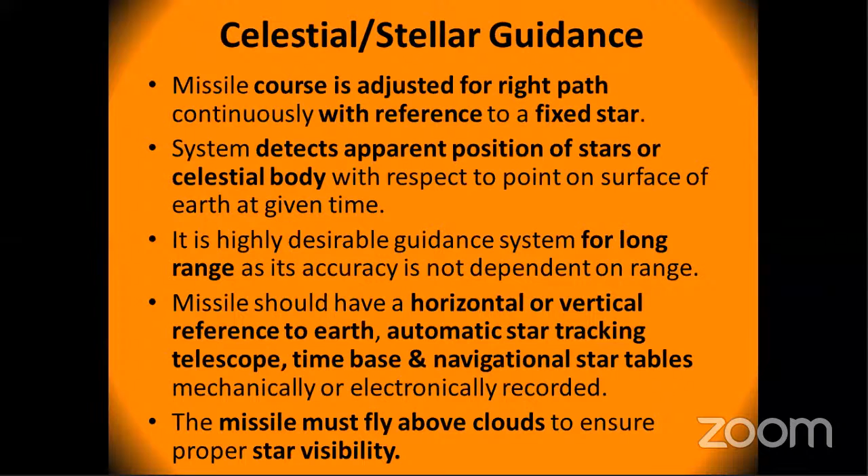Now coming to terrestrial guidance, this is going to be the last topic of the session, but it's very important. In terrestrial guidance systems, the basic idea is visuals.

Just like the example I gave at the start, if I feed my photo into your missile - let's say you design a missile and put my photo into the system and ask it to chase wherever it finds this person - it will keep searching every person's face and matching them with mine, and wherever it sees a maximum match, it will take that as a target, fix the coordinates, and hit me, right?

So the missile guidance system has coordinates and visuals to both left and right side. Apart from this terrestrial guidance, I want to tell you something.

In the early days, like in the 60s and 70s, this is a small story. In those days we didn't have that kind of interaction or system of cameras. If you all remember, a 5 MB hard disk was 1 meter by 5 meters in size, so you cannot store a lot of pictures. You cannot tell your system that if you see this person or that person, go for it, because you have a limited size. Now you know 256 GB and 1 terabyte fit onto a small chip.

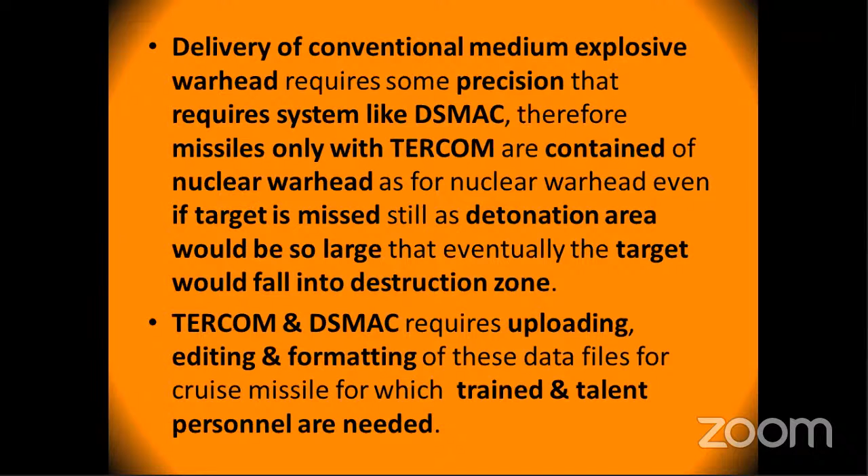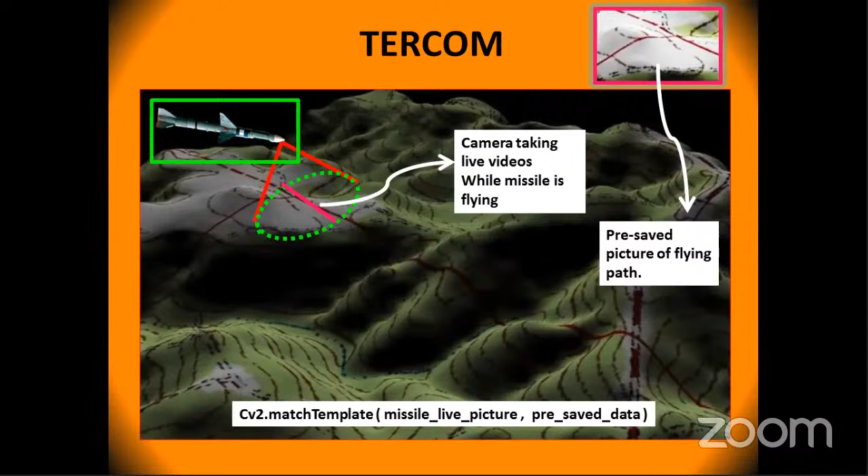With this kind of system, you can get to know about the accuracy of terrestrial guidance missiles. And that's the last part. With this, I would like to end the session and hand it over to Sir.